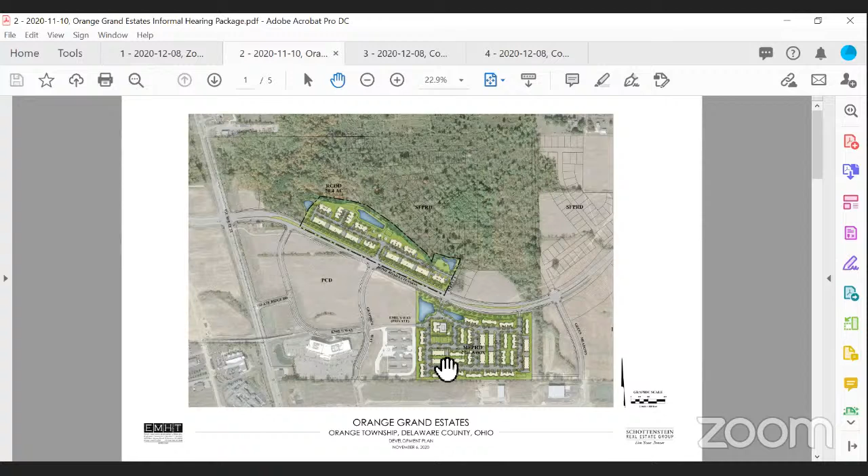So my name's Wes Smith, I'm with Schottenstein Real Estate Group. Back in 2018, Schottenstein Real Estate Group came into Orange Township for a rezoning of about 27 acres located on the south side of the to-be extended Home Road, which is right here, and also for a modification to a PERD on the north side of the to-be extended Home Road.

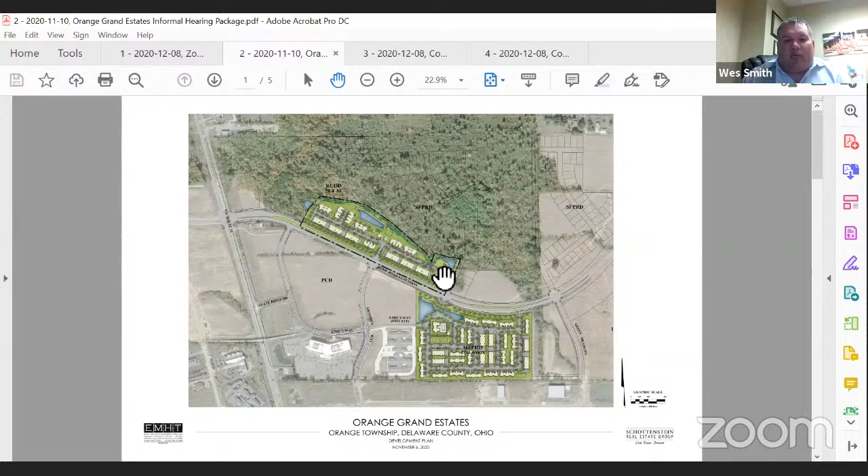Back in 2018, we formed a public-private partnership with a lot of different entities, including Orange Township, Delaware County, Delaware County Economic Development Group, Olentangy Schools, and Delaware County Engineer's Office, and a lot of other partners. The main goal was to really see what we could do to make the Home Road extension come to life, and extend Green Meadows and Graphics Way with that.

So through that public-private partnership, we were able to do that, and I believe as of September, Home Road from US 23 to Green Meadows has been open to the public. Green Meadows Drive has been extended to Home Road. Graphics Way has been extended to Home Road. So that includes all the infrastructure, the water, the sewer, everything that needs to be in place.

That can really be the key to unlock all the commercial development within the Slate Ridge community. The next step for Home Road is to make the extension across the railroad tracks and connect up to Lewis Center Road. So we're currently under construction on our 288 units on the south side of Home Road. Construction is going very well, we're about halfway through. The community is renting up very well right now.

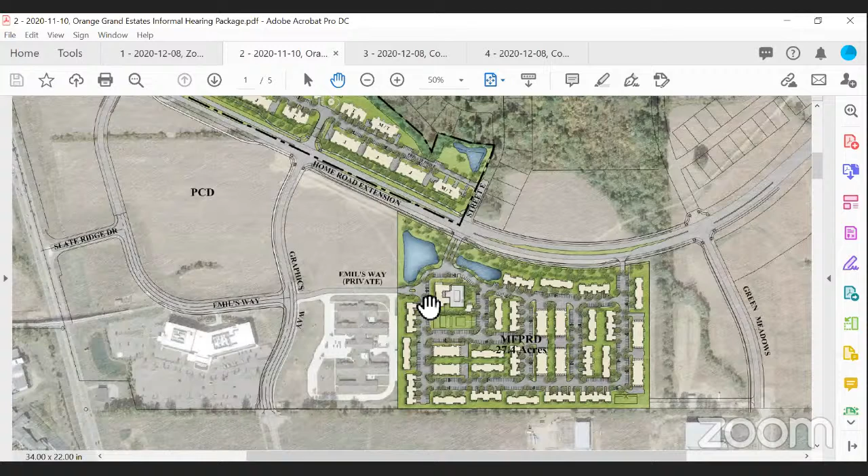Essentially, we have a centralized park area right here, and I'll zoom into that a little bit. So what we have planned for this area is a picnic shelter or a gazebo, a dog park back in this area, a fire pit, and then there's our mail, trash, and maintenance building. Our residents will actually have access to the clubhouse that is located on the multifamily on the south side of Home Road.

Does someone have a question, or is that just some feedback in the background? Sorry. That's all right. No, I'll keep going.

I apologize. So as far as open space is concerned, the required open space is 20%, which equals about 4 acres. On this particular site, we have about 8 acres of open space, which is equivalent to 39%. So we have almost doubled the open space requirements associated with the RCOD.

As far as density is concerned, we're allowed up to 8 units per acre. With the 120 units, we're at 5.88 units per acre. If we choose to go with the 112 unit layout, we're somewhere in the range of 5.49 units per acre.

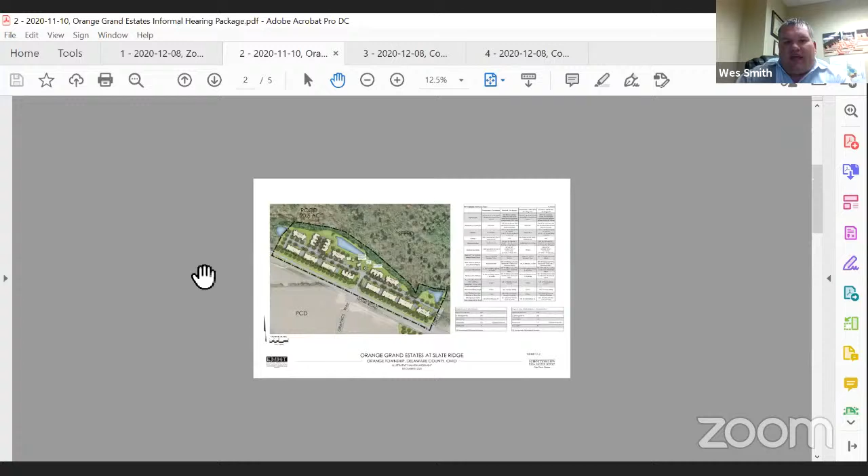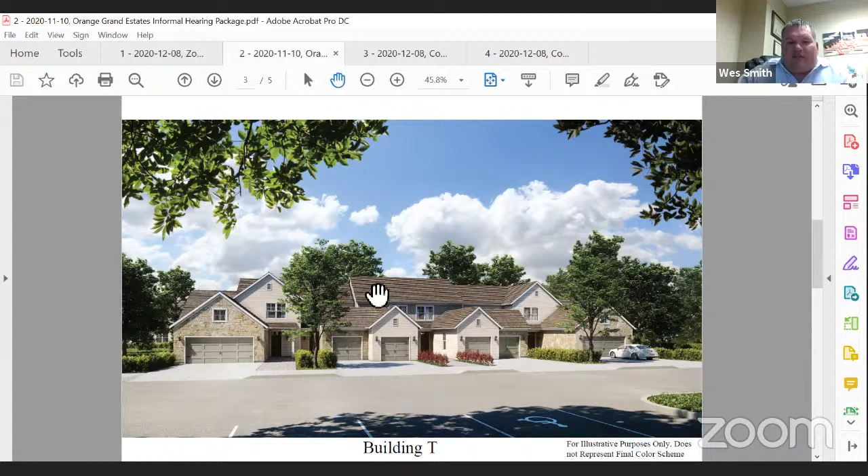As far as architecture is concerned, we have 3 buildings that are being proposed for this site. So we get really fancy with our building names. This is our first building, it's the T building. The T building is a new building for us. We're very excited about it. It's a 6-unit townhome building, meaning it has first and second floor living.

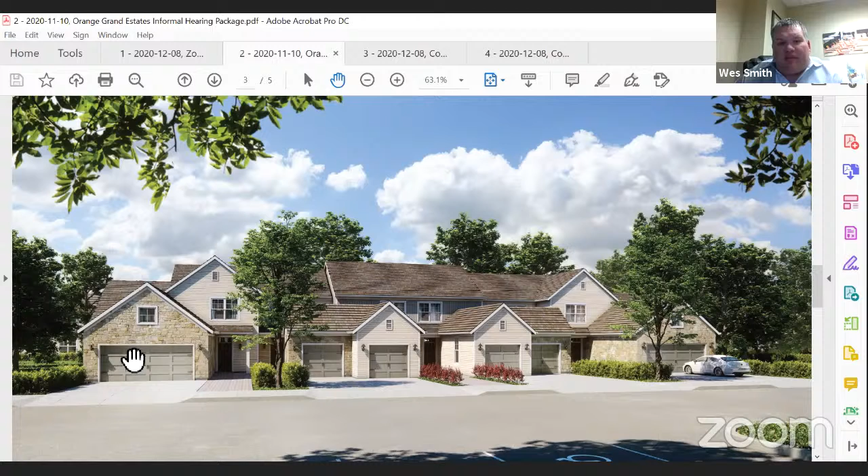The 4 interior units are 2-bedroom units with 1-car garages. The 2 end units are 3-bedroom units with 2-car garages. The thing that I like about the end units on this building is that it actually has a first floor master bedroom, which we're really excited about. We think it really hits a point in the marketplace that a lot of other people have not hit. So that's our first building.

This is our third building, we call it our J building. This building is what I call single floor living, or a garden style apartment. This building actually has 12 units associated with it, with 1-bedroom and 2-bedroom units within the building. What's interesting and unique about our product type is that each end of the building has garages associated with it. So of the 12 units, there's actually 10 garages associated with the building. So 10 out of the 12 units get their own garage.

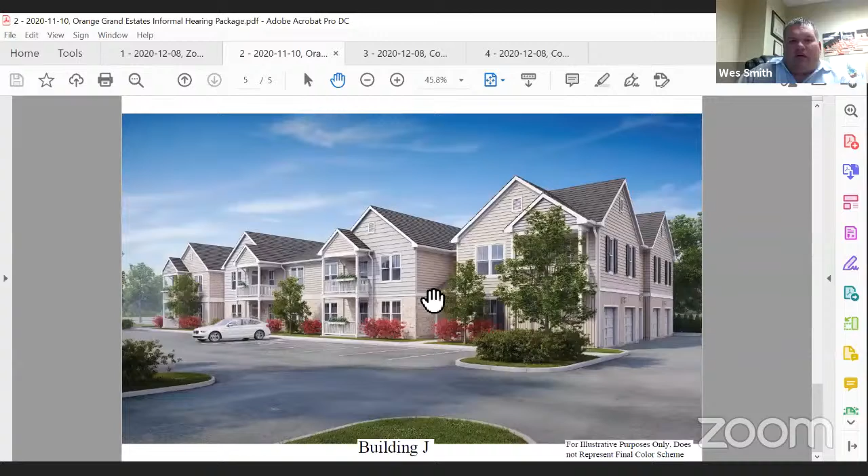So that's a little bit about our layout and our plan. I won't bore you guys with all the nitty-gritty details unless you really want me to, but I went through and did what I like to call a checklist of how we stacked up against the overlay district code.

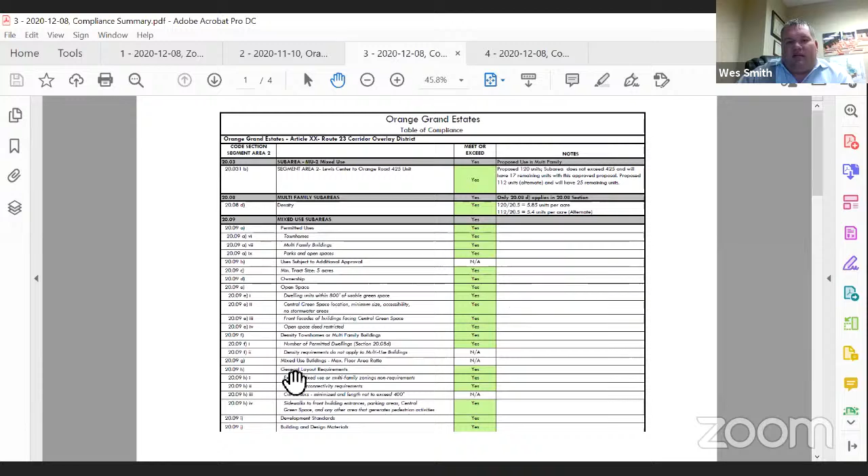So what I did is I went through all the different sections of code that apply to the development standards, as far as density, open space, parking requirements. I went through and just checked the box to make sure that we meet all the requirements. So as you can see, most of these columns are yes, we are meeting the requirements.

There are 3 divergences that we will actually be requesting as part of this application. Again, these divergences are coming from the tech comments that we received from staff. So the first divergence we will be requesting relates to the multi-use path and sidewalks along arterial roads.

Let me pull up this map real quick. As part of the requirement of the RCOD, this one's a better one, a little blown up. Perfect. It requires that a sidewalk or multi-use trail be extended across the frontage of your property.

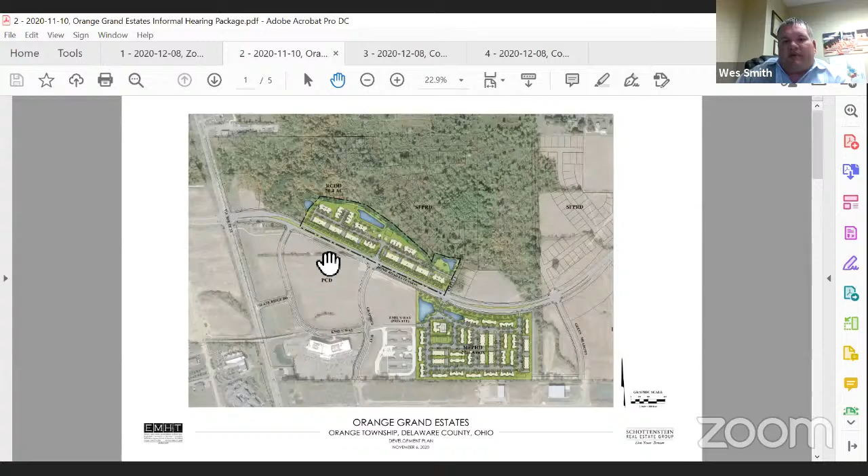So actually maybe this one is better. When the county installed Home Road, they were actually set to install multi-use trails on either side of Home Road. When the county got out there and got into their construction and design, they determined that they do not want to have a multi-use trail that extends along from Graphics Way to Home Road. The reason being is that they do not want to direct pedestrian traffic to this intersection. Instead, they would like to direct pedestrian traffic from Graphics Way down Graphics Way to Emil's Way, to the bridge that crosses over top of 23.

So they do not want this to be a pedestrian friendly intersection because ultimately Home Road will be the ultimate east-west connector through Delaware County. This Home Road is set to extend up to Lewis Center Road, which turns into Big Walnut, and the plan is that there will be an exit ramp at I-71 in Big Walnut, which will create this east-west connector road. So they wanted to keep pedestrians off of US 23 and guide them this way. So when the county installed Home Road, they did not install the path from this point. Ultimately, this intersection will be a signalized intersection with ped crossings and crosswalks, and so on.

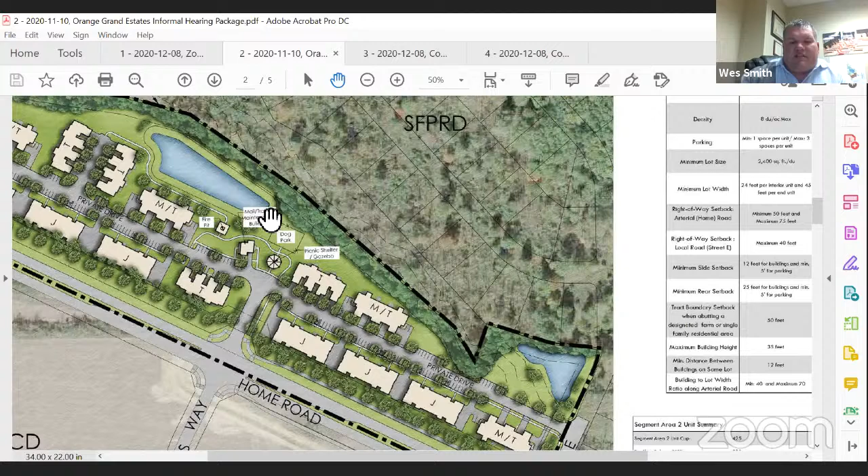Now, one thing we're going to do as part of the technical review comments is add some additional options for these amenities to choose from. I think we're going to add bocce ball, pickleball, and a community garden to maybe replace one of these. We find that amenities change based on clientele's liking pretty regularly, so we just wanted to give ourselves some flexibility.

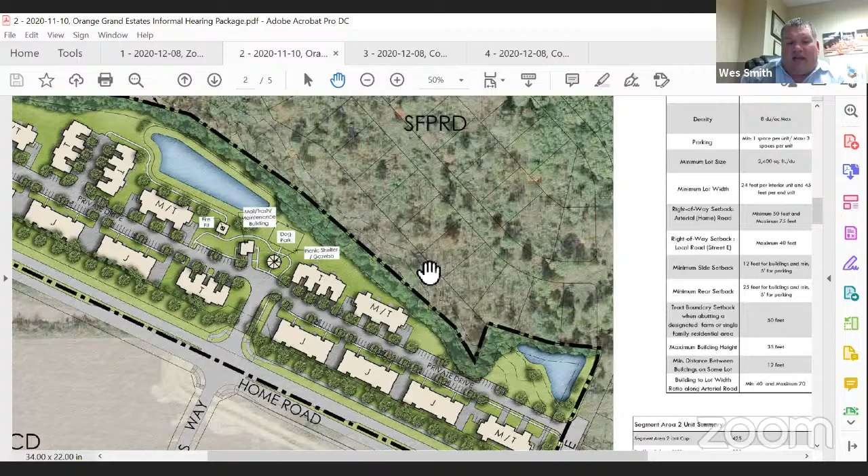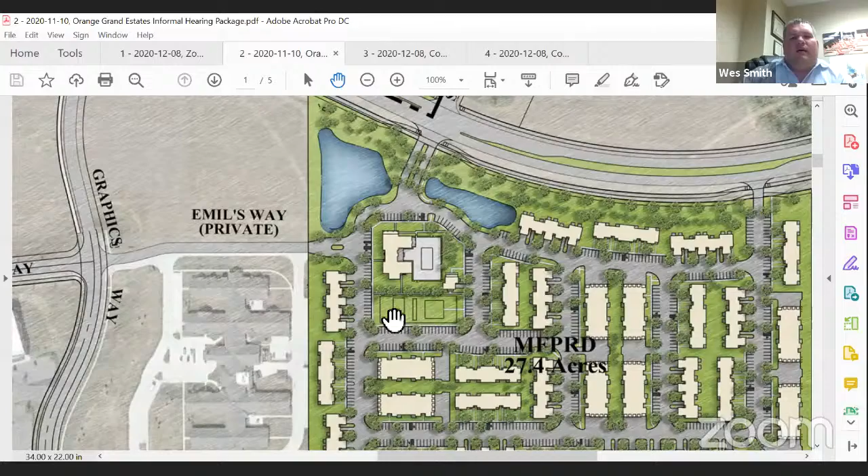Michelle, to answer your question, the residents that live on the north side will have access to the amenities on the south side of the road. There's a clubhouse that's somewhere in the range of 8,000 to 9,000 square feet. They'll have access to the pool, a fire pit, bocce ball, pickleball, and community garden on the south side of the road.

Well, that's good to know, because when this 23 corridor was developed, it was to try to attract younger, more younger professionals, because that's one thing we're lacking around here, right?

Rick, you make a really good point. Our renters are really renters by choice, meaning the price points of our communities, because we have such high-end communities, really attract those renters by choice, and they're really attracted to the amenities packages. What we find is that the demographics we hit are really those young professionals and the empty nesters—funny enough, those are the two biggest ends of the spectrum we find with our renters.

That's good to know. I think that's what we need, to be quite honest, in this community.

I can tell you, on the south side of the road, Rick, we cannot build it fast enough. There's 288 units on the south side of the road. We have 178 of those units leased up last time I checked. However, only 123 are able to be occupied, meaning we have a waiting list of about 50 people waiting to get into that community.

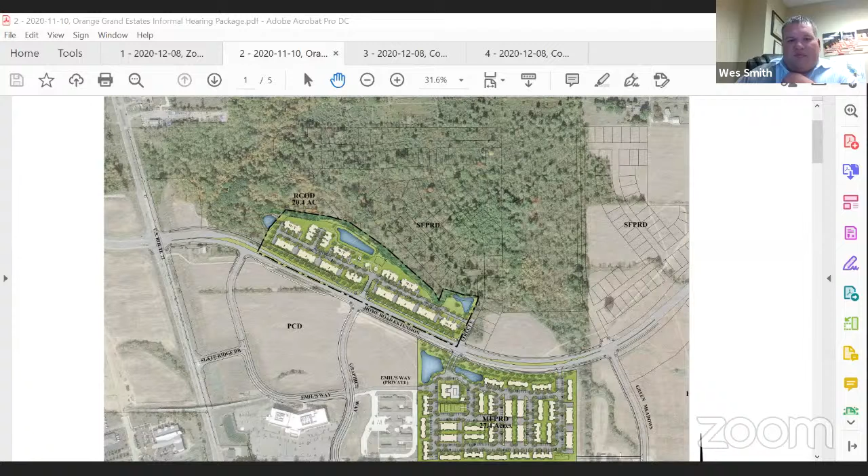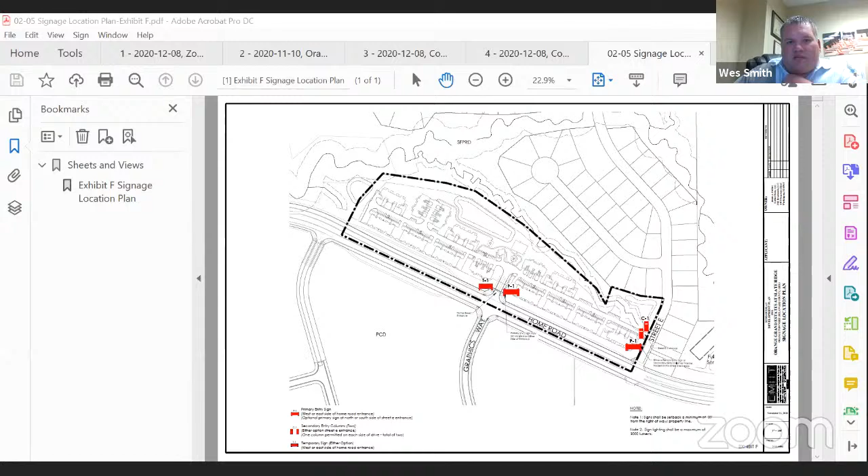Maybe I did a bad job explaining myself. I'm going to open up the sign—I'm still on screen share, right? So I'm going to open up the signage plan real quick. That's not the signage plan, that's the lighting plan. One second, I'm sorry—no worries. Signage plan. Perfect, and then I'm going to open up the signage details real quick.

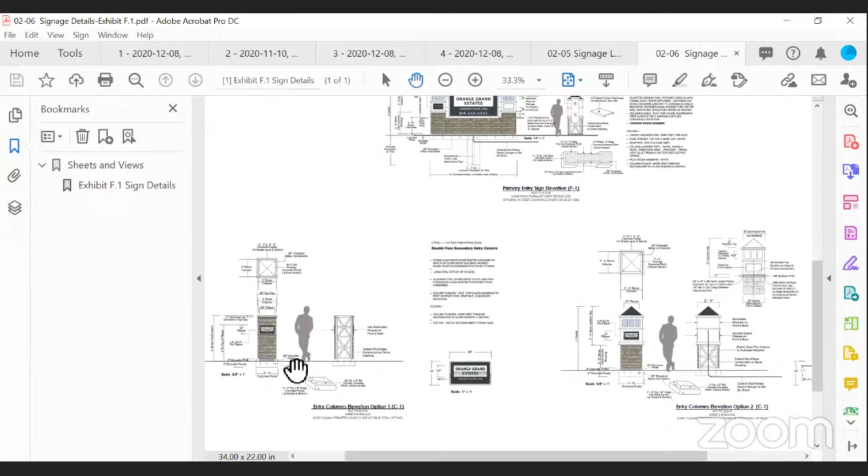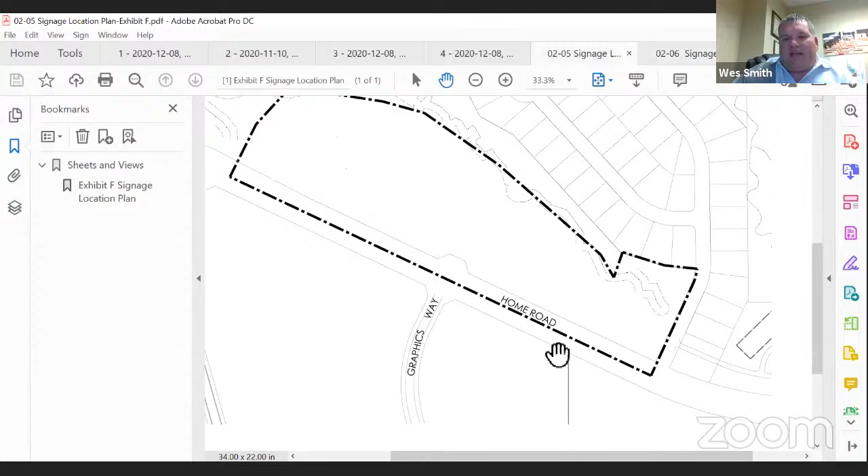This is our primary entry sign, Todd. I'm going to relate this back to the signage plan here in a second. This is our primary entry sign at Home Road, and this is one column option, and this is the other column option. So the plan is: at Home Road and Graphics Way, we will have a monument sign, the larger 8-foot sign, 32 square feet.

And then at this entry point, there's two options—we could either do the entry columns or the monument sign, either one. So there is no signage at the corner of Home Road and Street E; it would be at the secondary entrance right here. I guess my question is, why do you feel you need a monument sign along that? It's not going to be that visible from Home Road once everything else gets developed.

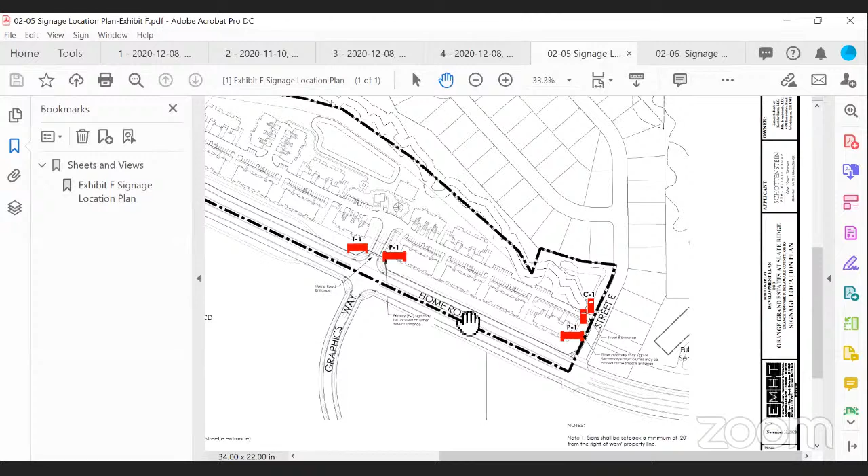I understand that—the thought process is, and maybe it will work better... yeah, this will be better. The thought process is when this develops out, you have this community here. At some point this will develop out too. Both of these two developments have access off of Street E, so this kind of signifies our development at that point.

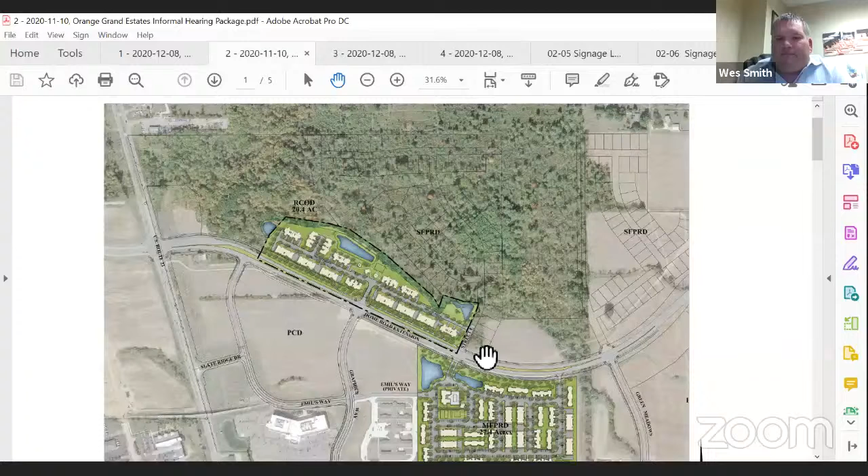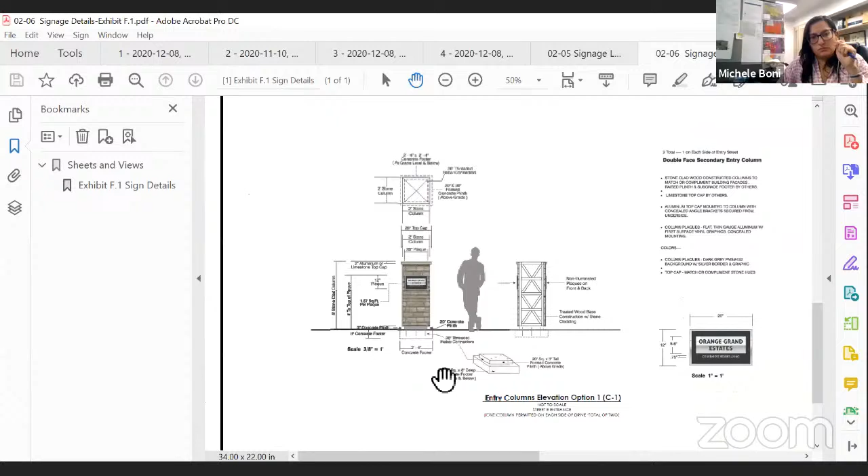So these columns are considered as part of the RCOD code. They are considered wayfinding signs, and the maximum height for a wayfinding sign is 3 feet.

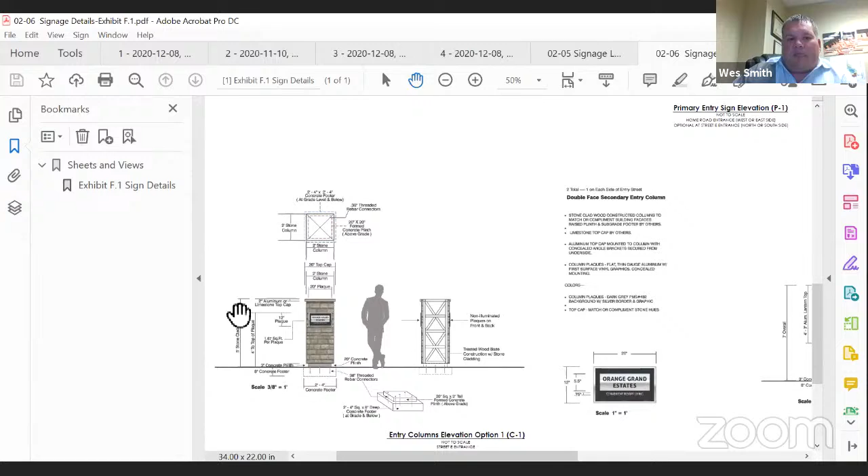So depending on which column we choose, it'll either be 5 feet or 7 feet. That is the specific divergence that we are going for, not whether it's a monument.

You're not looking to put... Yeah, you're not looking to put a monument sign on Street E then? Potentially, yeah. But that's permitted underneath the RCOD code.

Yeah, they are. Well, is it each street, or is it each public street, or at every entrance point, right? Correct. It's at each entrance point, so they're allowed to have 2 signs.

So a monument sign is permitted at each entrance point based on the Route 23 text. Sorry, I'm still getting used to this new code.

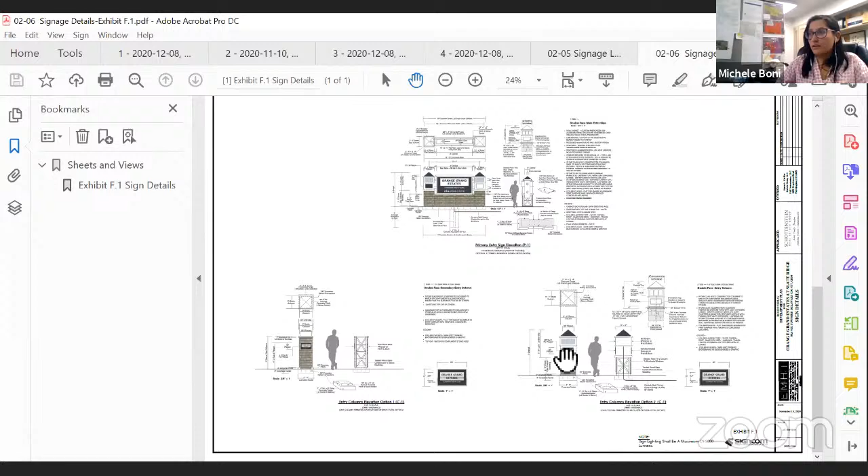So I guess, Todd, do you have concerns with the height of the columns, or what? Yeah. Okay. Yeah.

Hey Wes, it's Adam. I have a couple things to add. So in regards to the temporary signage, I get the divergence for the time frame, but maybe you don't know this yet, but what exactly would that signage be? Because it's going to be staying up so long.

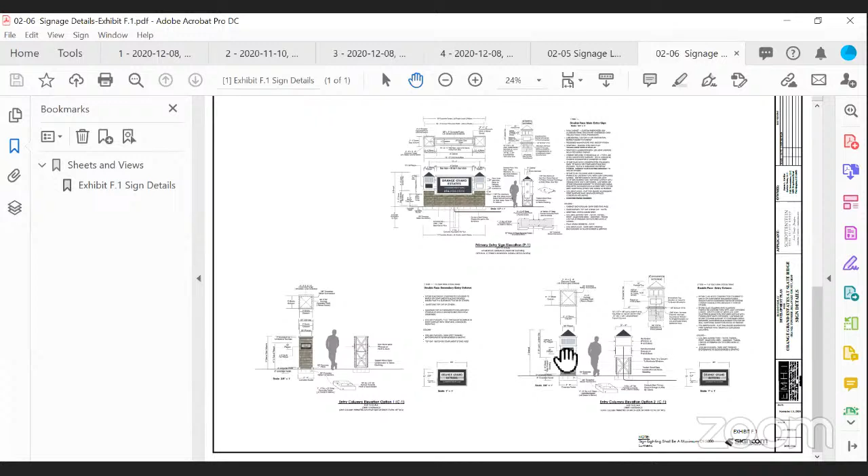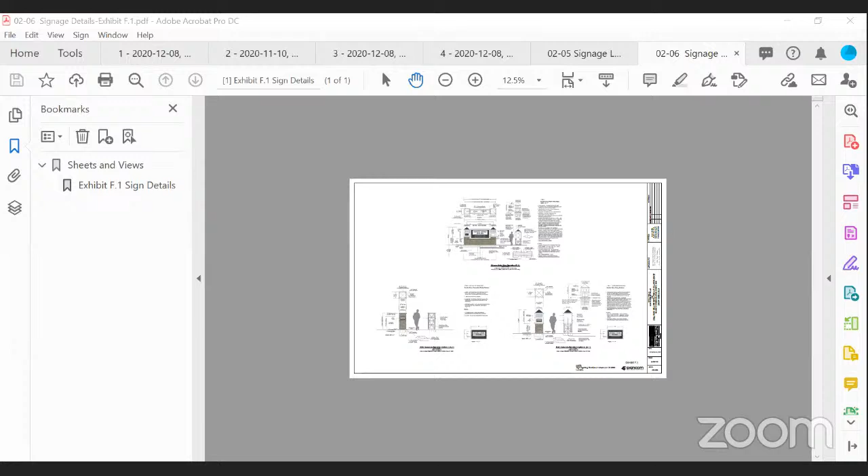Are you talking about just some kind of billboard things, whatever you call them, that are sitting out, identifying what's being built there and doing marketing, or okay. Yeah, it's in the package. Yeah, it'll be one of these two. Yep. Okay. All right. Sorry.

Yeah, I missed that. Yeah, so it'll be 8 foot tall. It's the really sturdy stuff that looks good over a long period of time.

It's 8 foot tall, 8x4 signage wall, I'll call it. Okay. And that complies with the standard too.

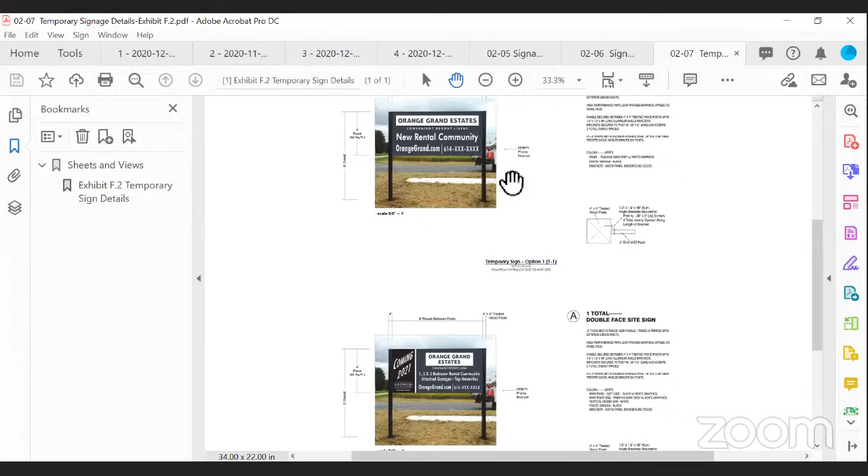So yeah. Okay. And then Wes, you mentioned I think it was a 112 unit option for this property. If you were to proceed with that, and this is more, I'm just curious, is that then eliminating one of the T buildings in the back or something and making that green space,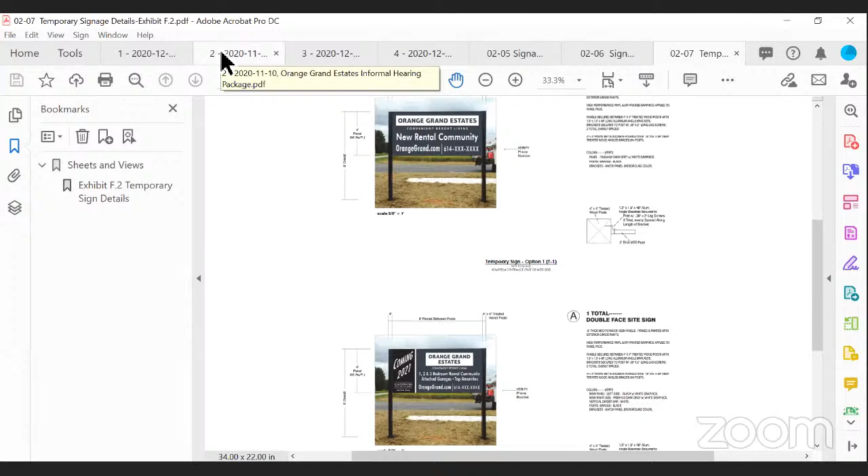or is it really going to change the dynamic of this layout where you have all the J buildings in the front or anything like that?

No, so the J buildings will stay in place. So essentially, this is how it would work. So the 120 unit layout would be all J's and all T's.

Oh, okay. So it's not eliminating a building, it's just changing the, okay. Yeah, the M building and the T building have very similar footprints, so they essentially just lay over top of each other.

Driveway locations change a little bit, but what we'll do in the package, the entire package that'll be shown, will be for the 120 unit layout.

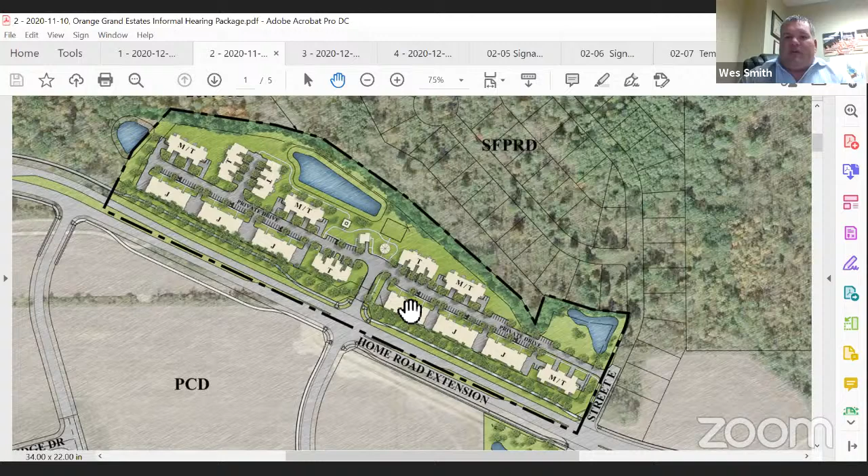And then there'll be a development plan that just shows the 112 unit layout as the alternate layout. Okay.

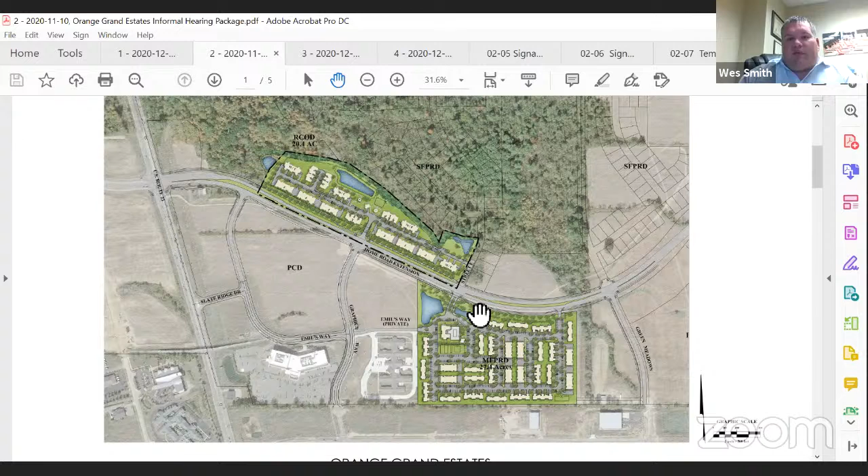And the factor that's going to make that determination is just based on the market. Is that... It really is, it really is. I mean, obviously we're going to have to get to a point. I mean, we're probably going to move on this, I'd say sometime in the spring, early summer.

So what we're going to do is analyze the south side and see where we're at on that and see how the market demand is on the south side, and then apply that to the north side for those two options.

And the market demand, I'm sure you guys know, it changes regularly. I mean, in a 6-month period, there'll be people saying, we want 3 bedrooms. We want 3 bedrooms. And you're like, okay, there's a little bit of a waiting list.

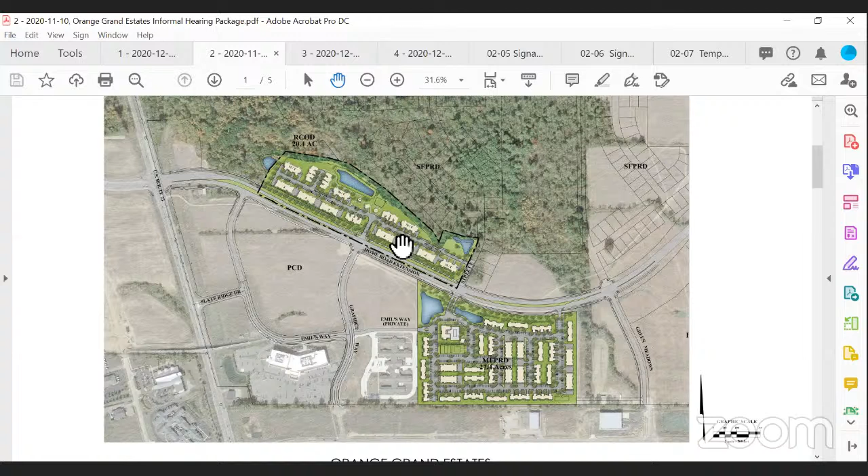We'll get you in. And then the next 6 months, it's all 2 bedrooms. It's cyclical. We always experience those types of things.

You talked about the path in front. Mm-hmm, that you said doesn't go all the way to, they don't want to go all the way to 23. Are you going to have a path that just goes to like the end of the property there, or? No. So what we'll do is, let me go to.

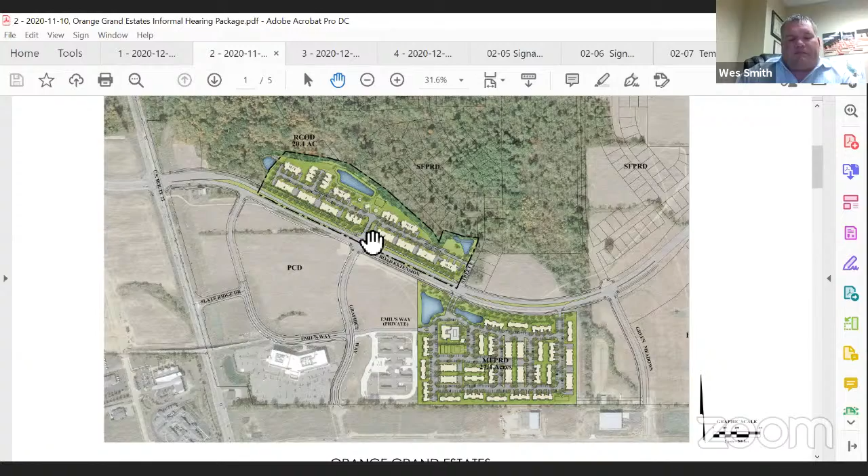So what we'll do, again, the county has already installed the path on either side of Home Road. They terminated the path on this side, again, because they did not want someone going up to Home Road and crossing, or going up Home Road and crossing Home Road.

So they've set up all the ramps at this intersection for that pedestrian crossing. We will have internal walks within our property that'll lead to a walk here, which will come to this intersection.

So to answer your question, Les, there will be no walk or path along this frontage.

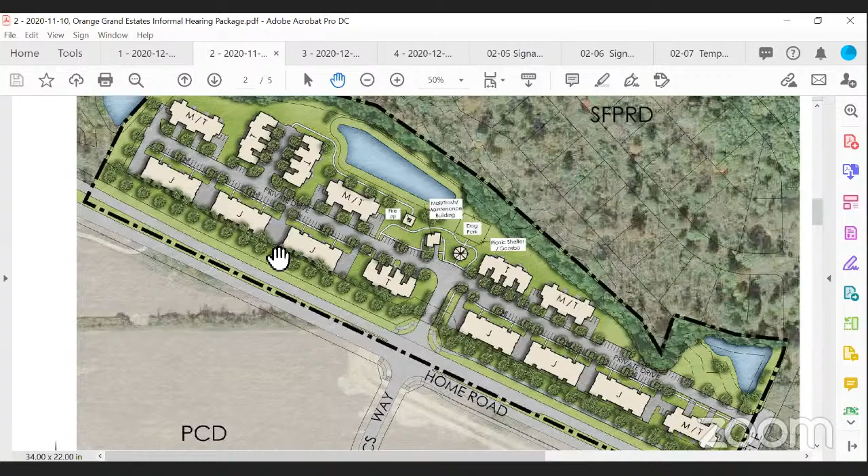But again, there is an existing path across this frontage, which leads all the way down to Green Meadows. And you have sidewalks within the development. Yep, sidewalks all throughout the development, all through the centralized open space.

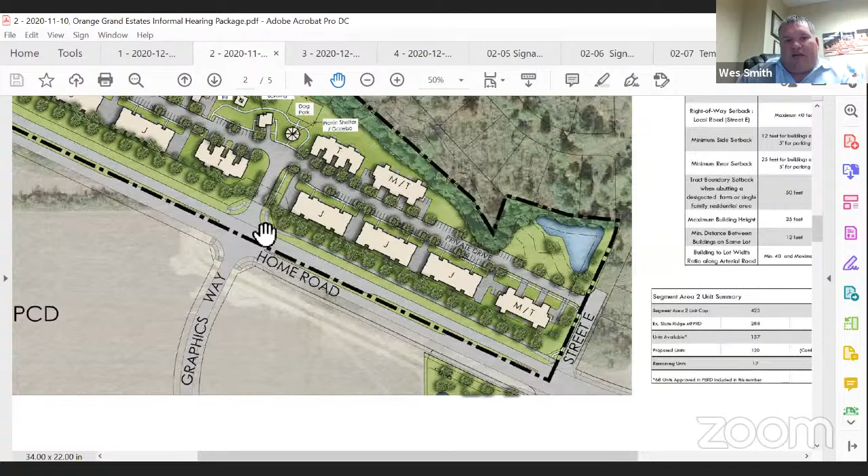Wes, can you remind me how the connection back to the other development on the north side for pedestrians works? There will be existing paths on both sides of the road, with a path leading down Street E connecting to this path, and another path leading down here connecting there. The county really wants people crossing the intersection and coming down this way, which is why they did not install curb ramps to cross the street here.

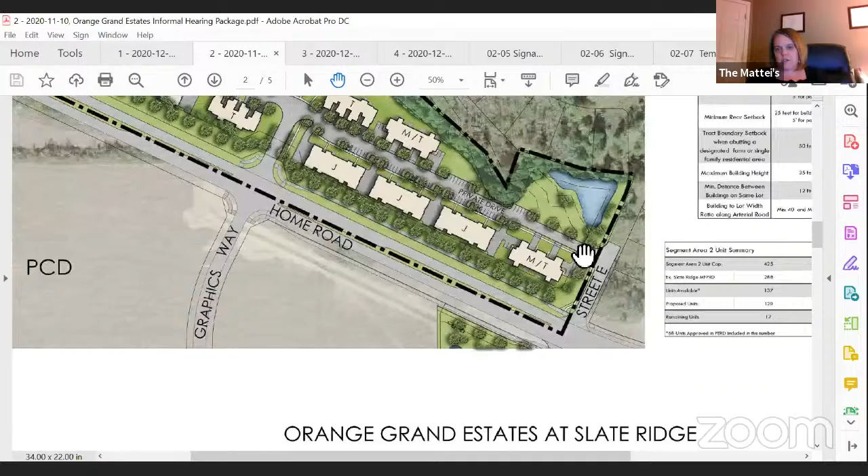I'm talking about from the stub of Street E going back into the future development to the northeast there. Whenever that development goes in, there will be sidewalks along that street, and if it goes in under the RCOD code, it's required. So yes, there will be paths that go back through there, along those streets, at the time they come in.

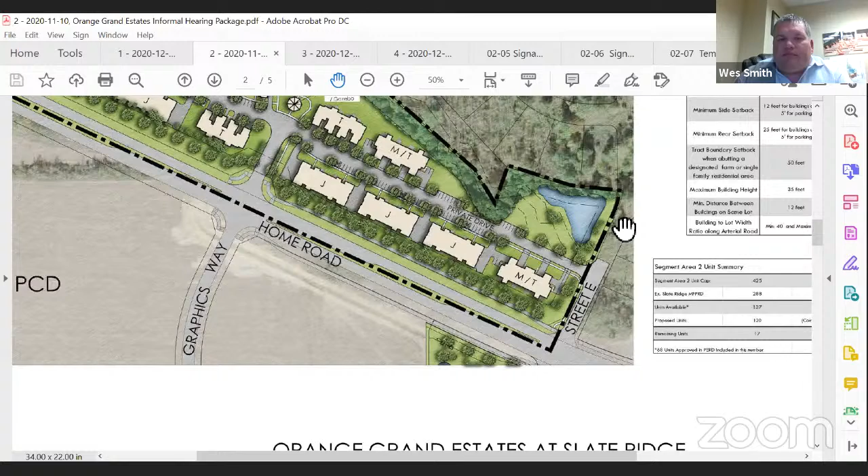Real quick, for access between the north and south side of the property, you really have to go all the way down to Graphics Way to cross over. Is that the county's intent? Yes. When this intersection eventually signalizes, they'll have all the ped crossings and things of that nature there.

As part of the revised submittal going to the trustees, the applicants agreed to provide some correspondence from the county engineer, correct Wes? Tiffany Jenkins, with the Delaware County Engineer's Office, was the project manager for the Home Road project. We asked her about the path we had shown across here, and she said that path was not installed as part of the road, and they do not want pedestrian traffic going to that intersection, so we need to take that off.

That all makes perfect sense, that's why that bridge is there, to get people safely across 23. So let's direct people so they get safely across 23.

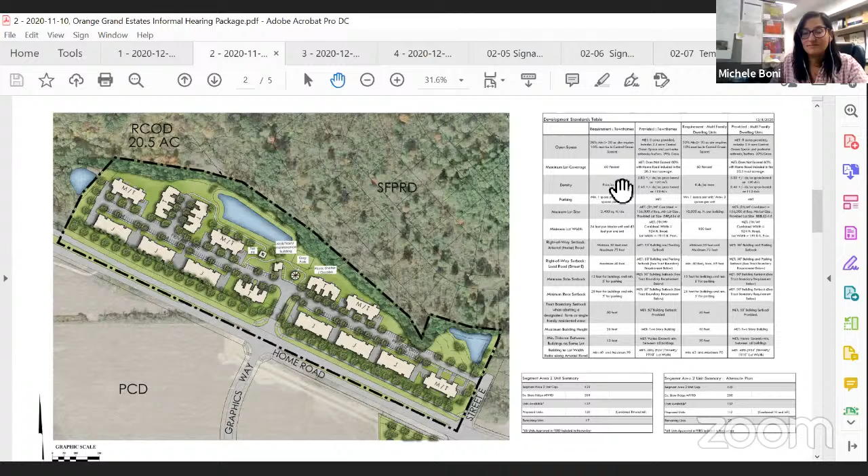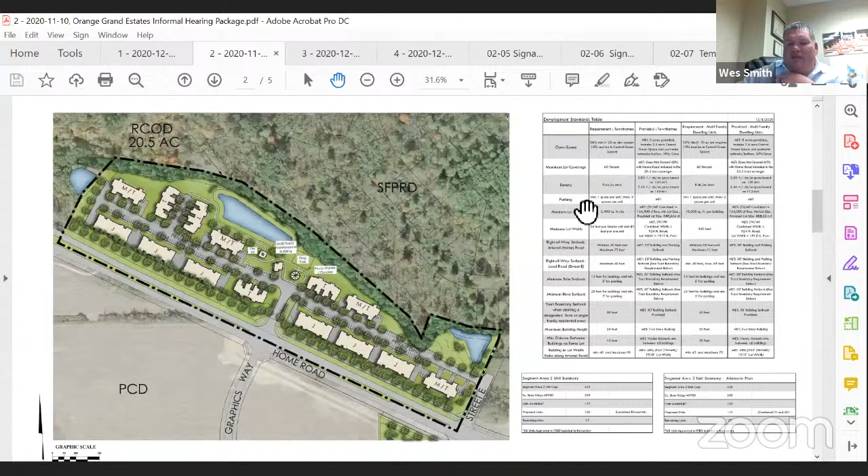Great. Awesome, well again thank you guys, it's always great being in front of this board, and I think you guys have a thankless job, volunteering your time and evenings away from your family. So thank you for your time, energy, and efforts, and again Michele and Holly, thank you for your input and guidance, I appreciate it very much. Thank you, no problem, all right, have a good evening everybody. Thank you Wes, thanks Wes, thanks all, bye-bye Michele, thank you all.